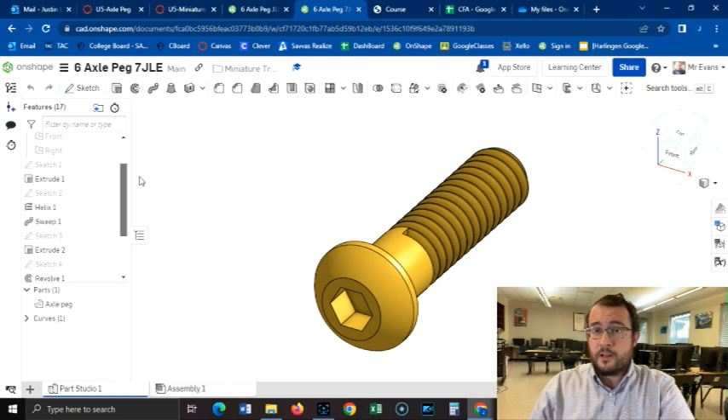Today we're going to make the axle peg, the screw, whatever you'd like to call it, the bolt. I've titled mine axle peg, and it's got a few notable features here that are different. We've got these threads that are here, just like a screw. We've got this rounded top with a hexagon head on it. And this one takes a few steps, but we're gonna get through it all together, and I'm gonna show you exactly what to do. So we'll start with our normal starting area.

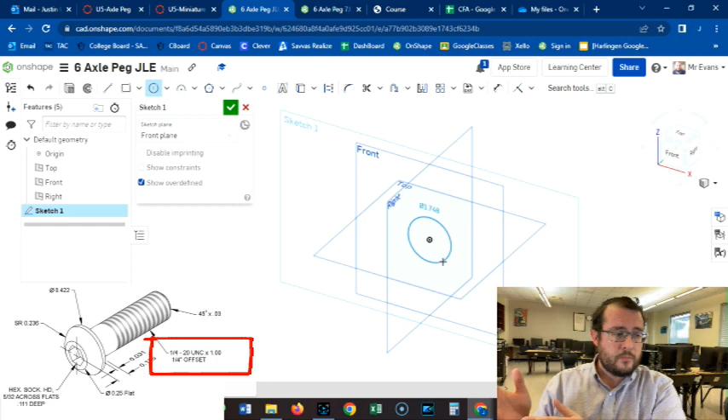I'm going to put a sketch on the front view and I want to put a circle there. Now the circle, if I look at my drawing here, it says 1/4-20 UNC times 1. And then a 1/4 inch offset. So 20 UNC, 1/4, that just means a 1/4 of an inch. So we're gonna type that as our diameter, 0.25. It's kind of small.

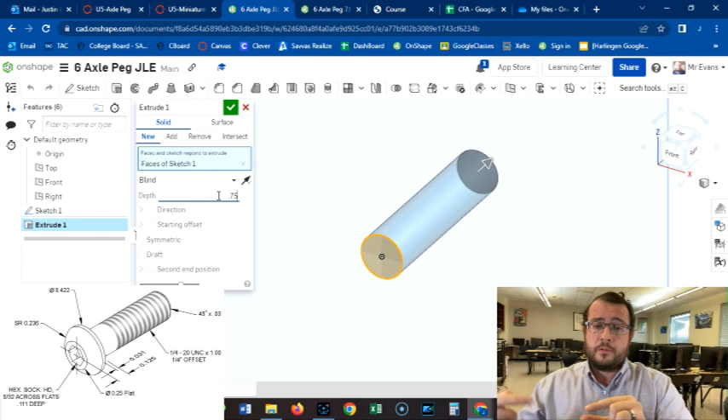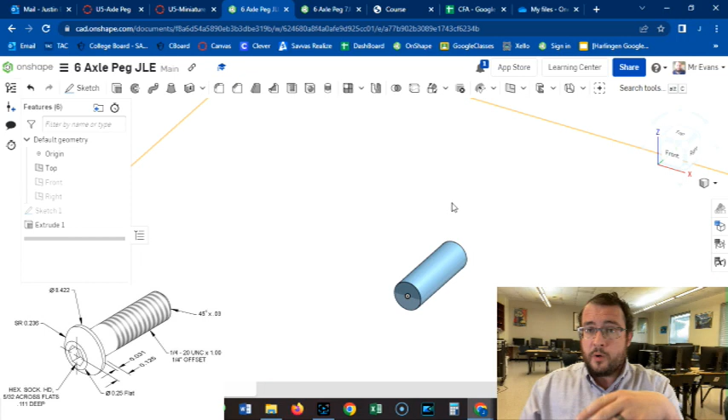Now notice that I've put this right in the middle of my right and top. I think the right view I'd like to hide, and the front view I'd like to hide. Maybe I'll do like that. So it just looks like this. And now for this part, I'm going to put the threads on it. So I'm going to create a sketch on the top view.

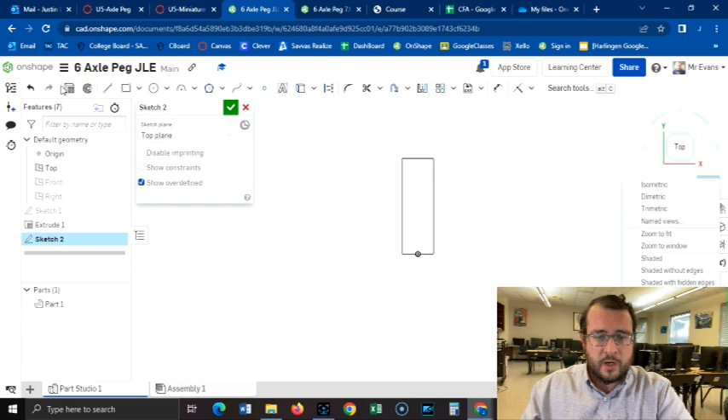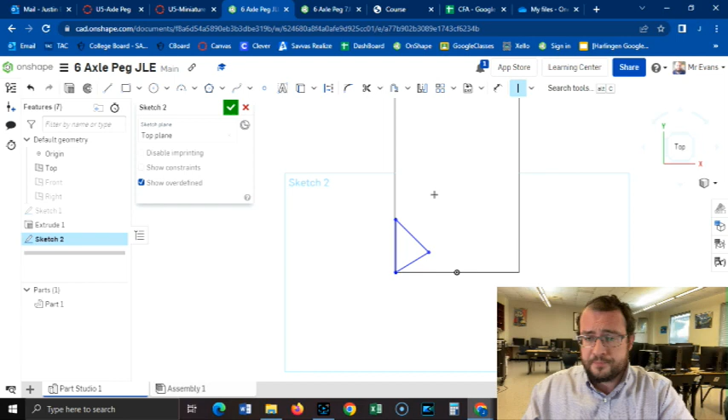I think it's behind my head here, but let me make sure I find it. I'm just putting on hidden edges visible so I can see the edges of it, not think about it as a round piece. I want to put a little triangle, right? Let me really zoom in here. We want to put a triangle right here. And this triangle, I need a few things. I need this side right here to be vertical. I need all sides to be equal. So I'm gonna click equal, and I'm gonna click all sides equal. And this will give me an equilateral triangle.

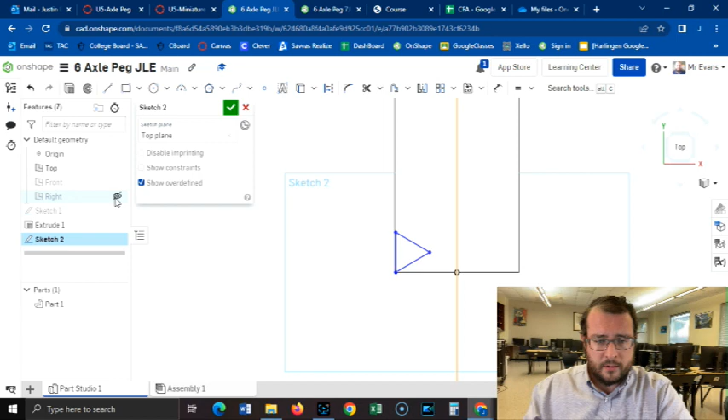And because this is, let's see here. Do I need to turn back on my right? Yeah, I need to turn back on my right. Because this is a 1/4 of an inch, I need this to be 0.125, so that it's right at the edge of it. And I have this equilateral triangle here.

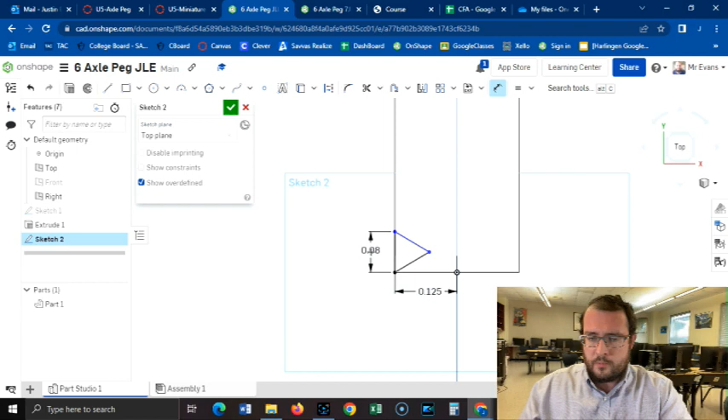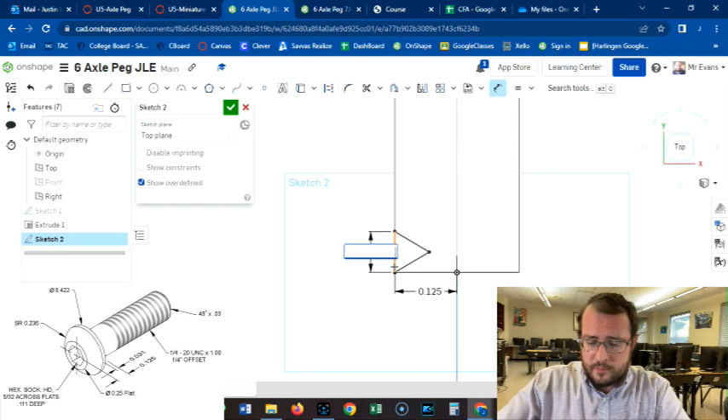I'm going to put a dimension here. So if I've got 20 UNC, that means 20 times that it threads around. 20 wraps in 1 inch is what that would be. So 20 UNC, 20 of them in 1 inch. So that would take 1 inch and divide it by 20. Should be 0.05. So I'm gonna put 0.05 like that.

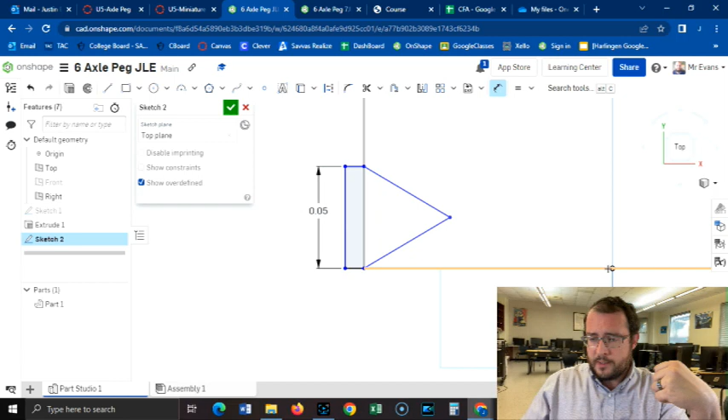And this thing does sometimes give a little bit of a problem, so what I'm gonna do is I'm gonna extend up just a tiny bit. The number doesn't matter as much. Just gonna extend up, and I'm gonna cut this part away. Let me put my number back just so I don't forget it. And this number back, because I might change them. There we go. So this is an equilateral triangle, and we're gonna cut that part out. I need to turn back on my hidden edges as visible. All the wrong stuff. Shaded. There we go.

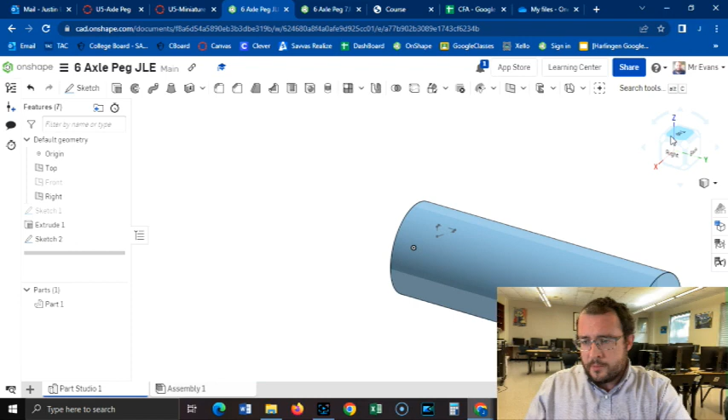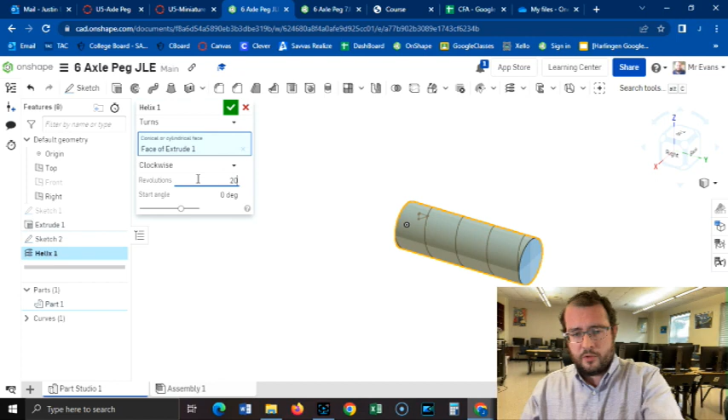So I'm going to take this, and I'm going to now do a helix. Where are you? There you are, helix. So I want to put a helix on this surface, and I want it to make 20 revolutions. But actually, because it's 1/4 offset, we'll put 15 revolutions. There.

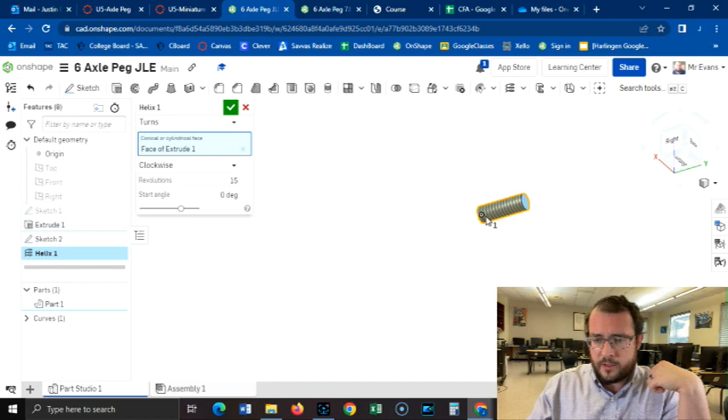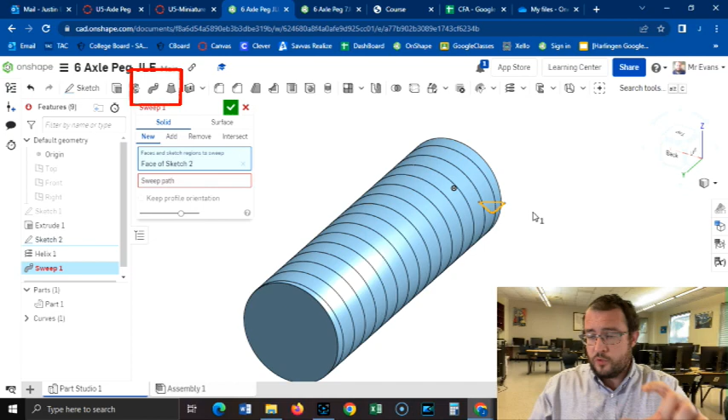Okay, this thing is extending out way too much every time I do that. There we go. Just trying to make sure I can still see my sketch. There it is. Okay. And turns. All right, and now we're going to use sweep, and our face is going to be our little triangle, and this is going to be a remove, and our sweep path is going to be our helix. You can already see it forming. There is our helical shape. That's our screw. This is the main part.

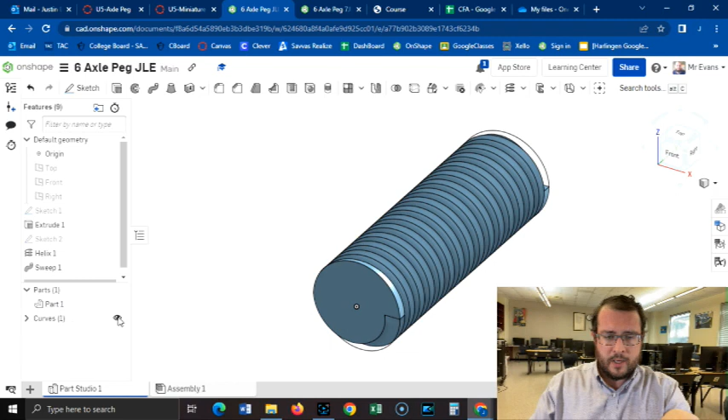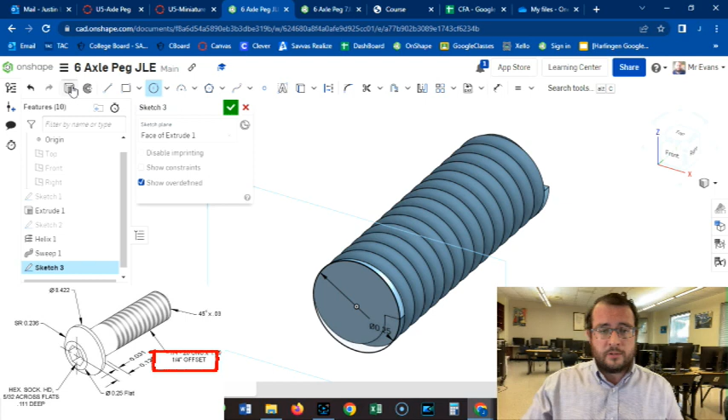Hit the check mark. We're going to start a sketch right on the front, and actually right now we're going to hide the curve here, so hide that so it's not showing anymore, and we're going to put a sketch right on this front face and make our circle 0.25, and we're going to extrude that out the offset amount. That should be 0.25 also. All right.

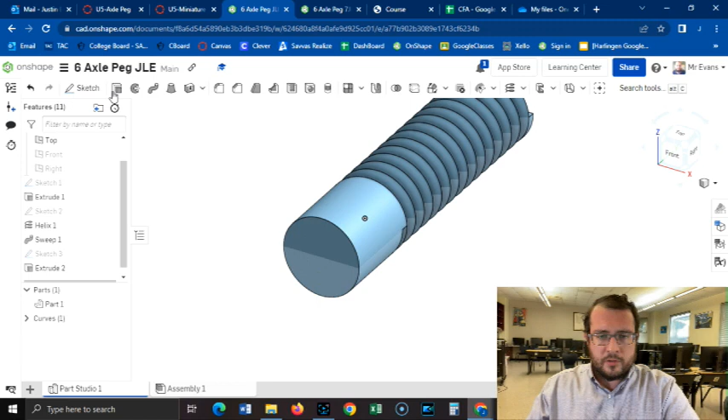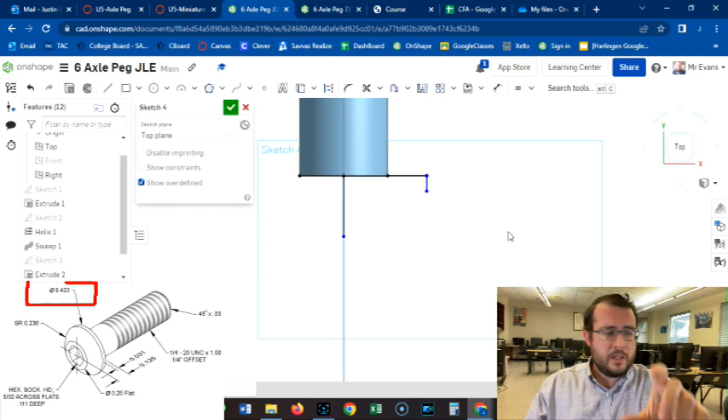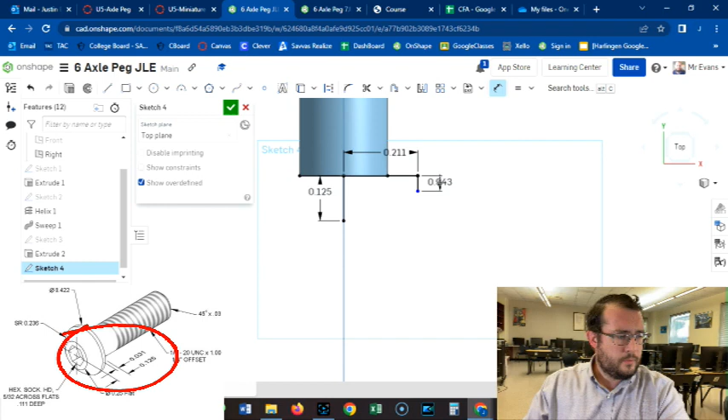It says that the diameter is 0.422 for the whole diameter of the bolt, so we need that to be half of that, so 0.422 would be 0.211, and the height of it coming out, it says it's 125, so 0.125. And we need this right here to be 0.031.

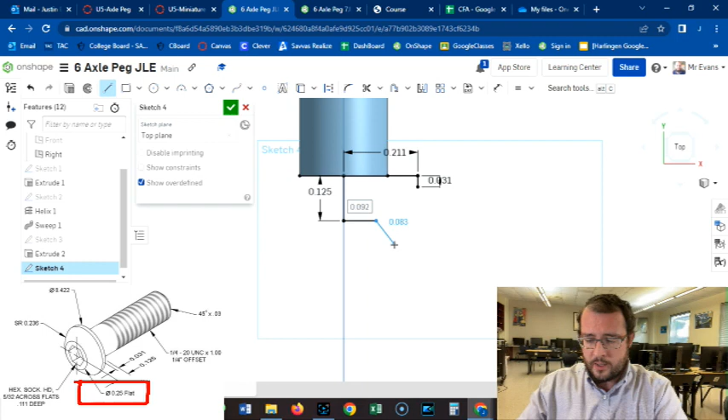And then we have a flat surface coming out. It says that the flat surface where the hexagon sits is 1/4 of an inch. So I need that out, and that needs to be half of that, so 0.25 divided by 2. There we go.

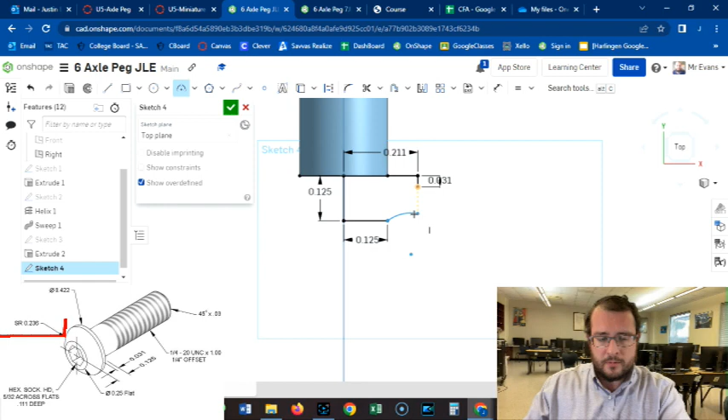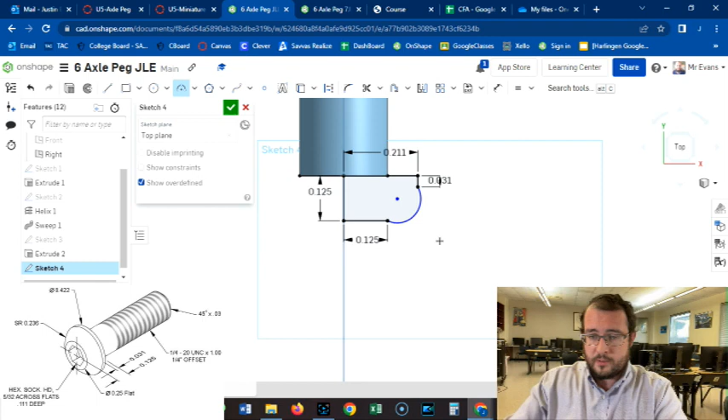And now I need the rounded portion to it. So I need an arc, a center point arc, or a 3-point arc. Here to, no, it's gonna go backwards there. Here to here. And I don't know how far out it goes. I don't want it to snap to that or anything, so I'm gonna overshoot it. And the spherical radius is 0.236. Perfect. We got it.

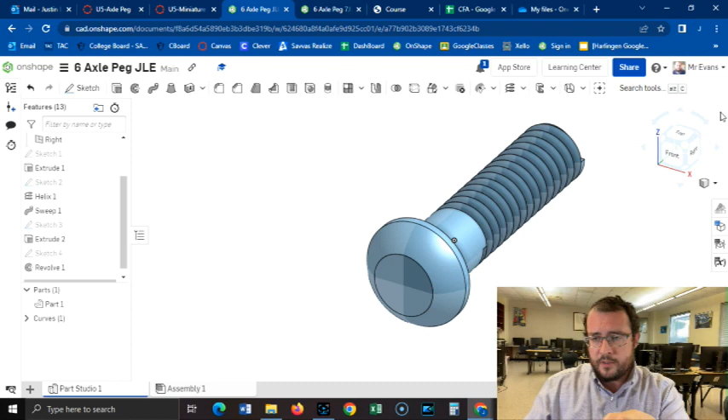Exactly what we need. This we need to revolve. And our revolve axis is the short line here. And it's really starting to come together now. Now I need to create on that surface. I should have a good look. Yeah. So now I need to create on the surface here my hexagon. So I'm going to click this surface.

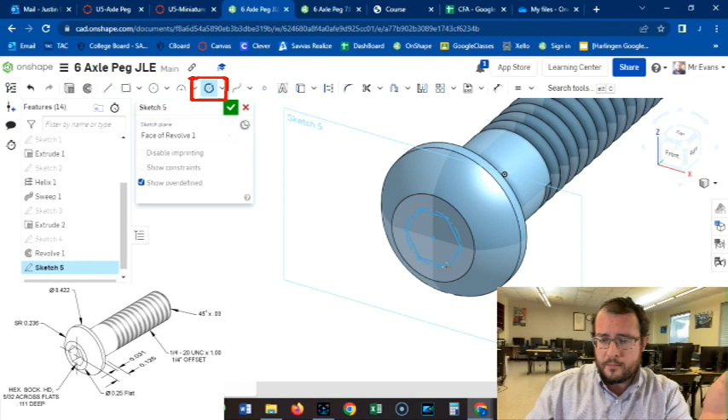And here's a new tool for you here. It's called Inscribed Polygon, or Circumscribed, I think. And I would like to keep it straight up and down as best as I can. So I want to come out at this angle. See the dotted lines that I have there?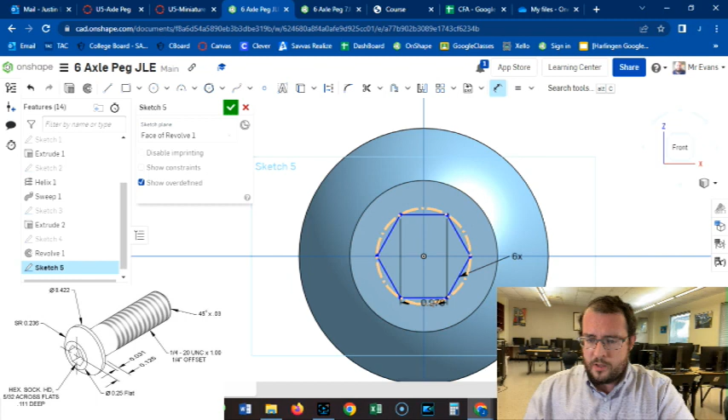And you can control how many sides it has. Of course, we want 6. And if you missed it, you can always double click here and say, oh, I know that needed to be a different number. So 6 is the number we want. And I want the distance from here to here to be 5/32. So that's 5 divided by 32. There we go.

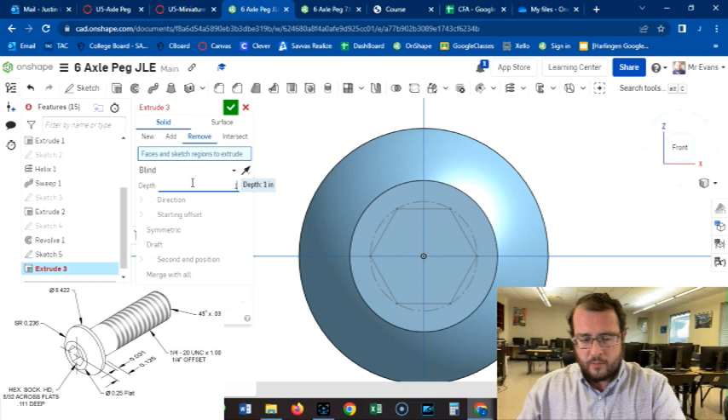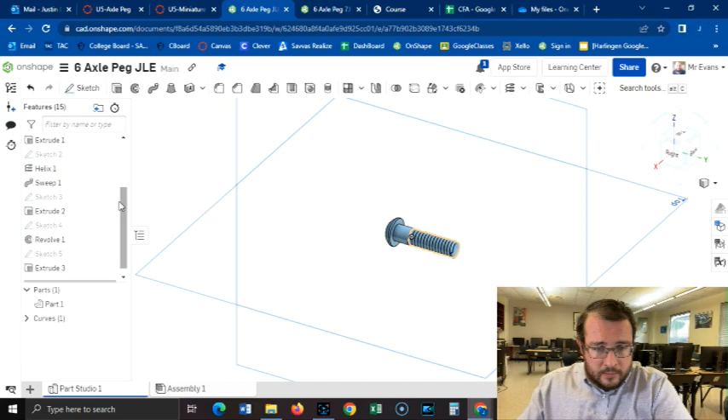And it says the depth for that is 0.111. So we're going to extrude that guy, remove 0.111. Perfect. We are almost done. The next part, we just have this little portion to deal with, and that's the ending of it. Let me get rid of these things. They zoom out so much. This is the way this thing ends here.

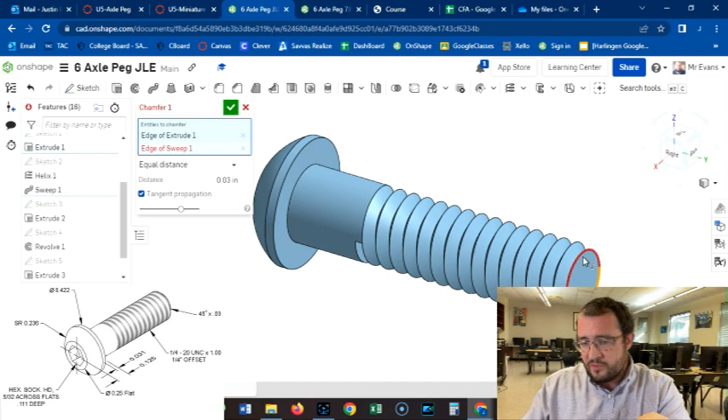Now, I want to add a chamfer to it, but if we mess around with the chamfer, as you can see, it doesn't like it. The chamfer should be, according to it, 45 degrees, 0.03. But that just doesn't really work because there's thin little pieces here. So what we're gonna do is, let me bring back the top view, and I'm gonna create a sketch on the top,

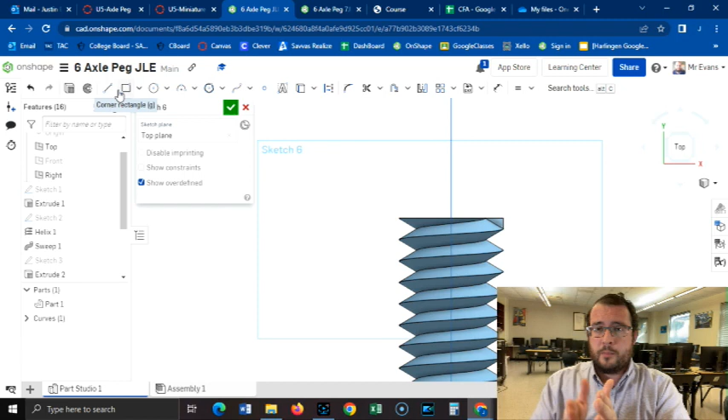just like this. And I need to bring back my right, and I'm gonna do just like I did with the helix. I'm gonna make it a triangle. I'm gonna not do that. I need to reference this edge. So I'm gonna right click and use, and I'm gonna put a triangle out here.

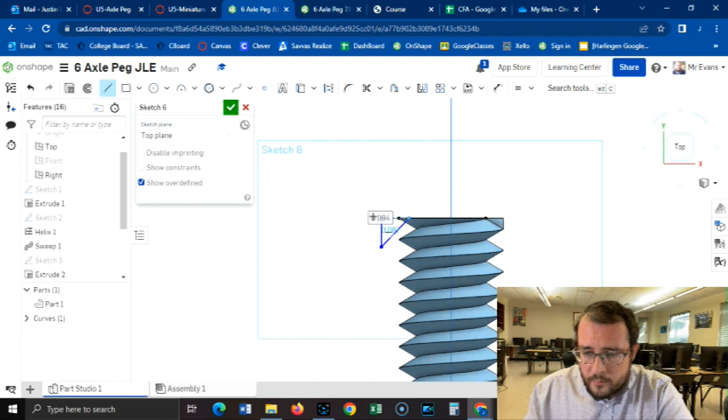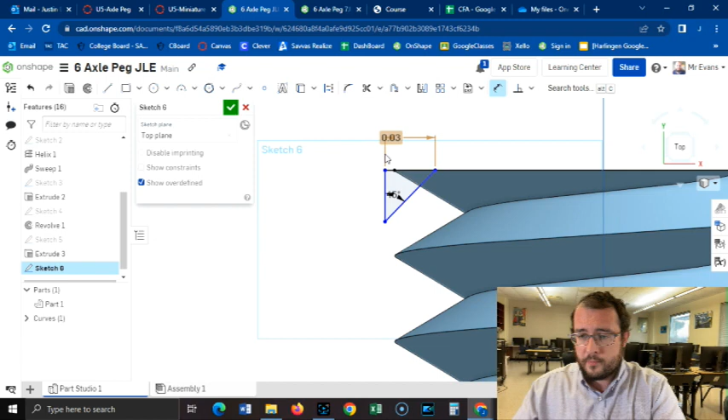And I need this triangle to be 45 degrees. And this one perpendicular. There we go. And I need this to be 0.03. And I need this to be 0.125.

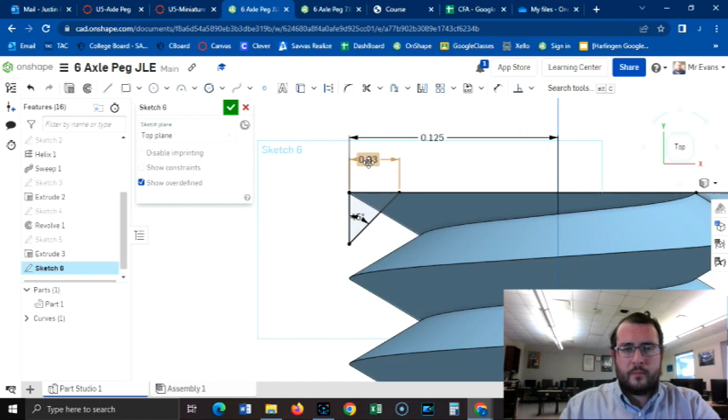There we go. Hopefully yours didn't do that to you. I just deleted that little cube. I don't know why that was a problem, but I deleted this little piece right here. And I'm going to use this to cut away a chamfer, because the chamfer tool isn't working. A chamfer is just, instead of a rounded edge, a little 45-degree cut around an edge.

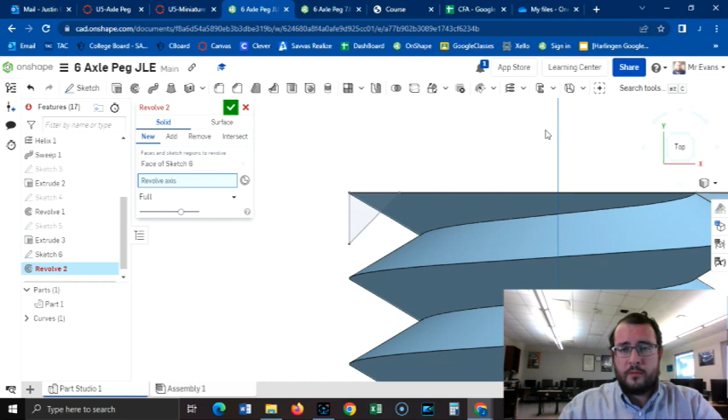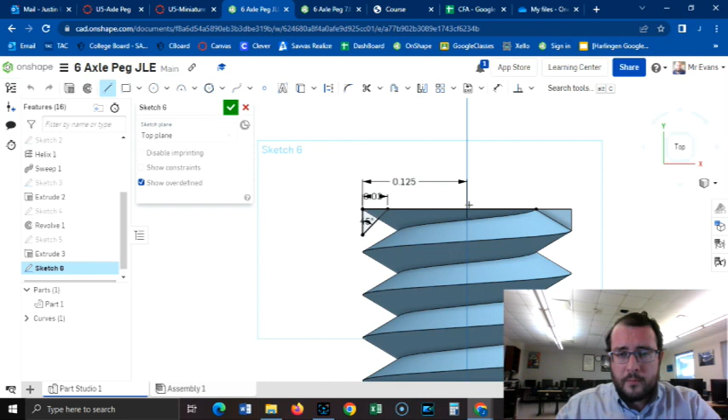So I'm going to hit revolve, and I'm going to revolve it around, oh, that's going to be a little bit of a problem. I don't have that. I should have an axis first. I forgot about that. Let's just make one in the sketch. My bad. So we'll open up the sketch, and we'll just put a little line right at the middle. There we go. And that's going to be where our axis is.

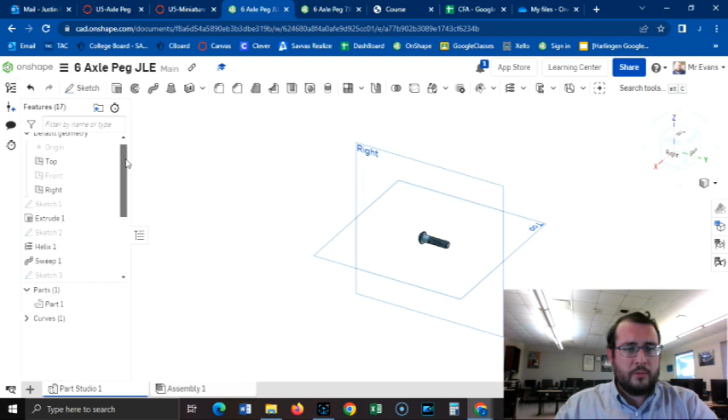So I'll hit revolve, remove my triangle, revolve axis, the center there, and it's going to shave off the end to look a lot like how a screw looks. I want to hide all of my views here, and this is our shaved ending. That's our screw. I encourage you to give it some color.

Make sure that you hide the curves. Right click, add the material. This one should be steel, I think. Steel. What you need to do is go to each one of your parts and make sure that you have the correct materials. So you go to the miniature train page, make sure that you put all the materials.

And then another thing that we forgot about is to put the names. So to do that, right click on part 1 down here, rename, and put axle peg. And I want you to do that for each one of your parts, and this actually makes the assembly process easier, because everything that you bring in comes in as these names, but they all say part 1. So if you give the names there, it becomes a lot easier to work with.

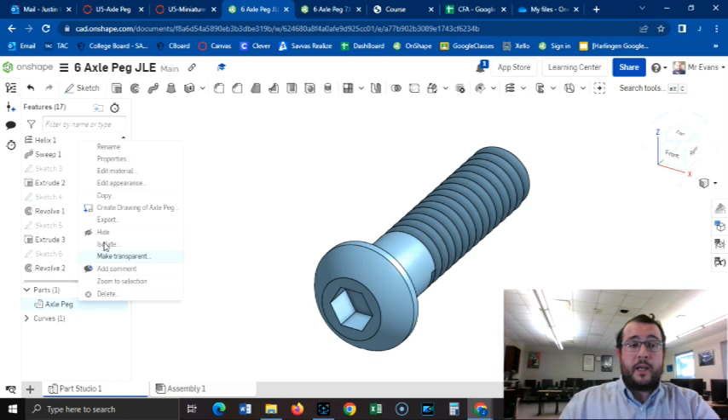Go ahead and give it an appearance so that it matches whatever color scheme you chose. You can choose anything that you want, and then meet me over at the assembly, and we'll put the whole train together. If you have any questions, feel free to ask. When you're done, let me know, and I'll grade it at your desk, or you can submit it to me through Canvas.